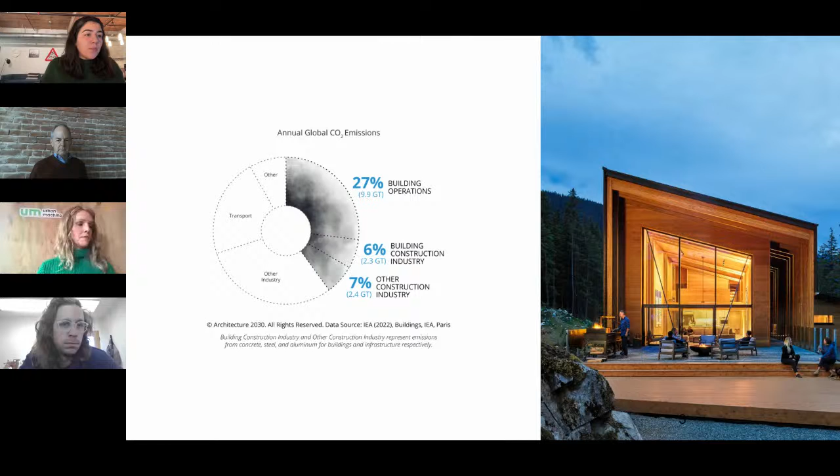And so that leads into SE 2050. If anybody has heard of Architecture 2030, SE 2050 is very similar, except we gave ourselves 20 extra years. SE 2050 is on a mission to transform the practice of structural engineering in a way that is holistic, firm-wide, project-based, and data-driven.

When you commit to that, one of the main ways we do that is we have to submit these annual ECAP reports, called the Embodied Carbon Action Plans reports. It's this accountability that helps keep moving firms forward towards being net zero by 2050. We have to submit them to SE 2050 every single year, telling them what we did this year and what we plan to do next year, which I think is a really big driving force in changing the industry on the design side.

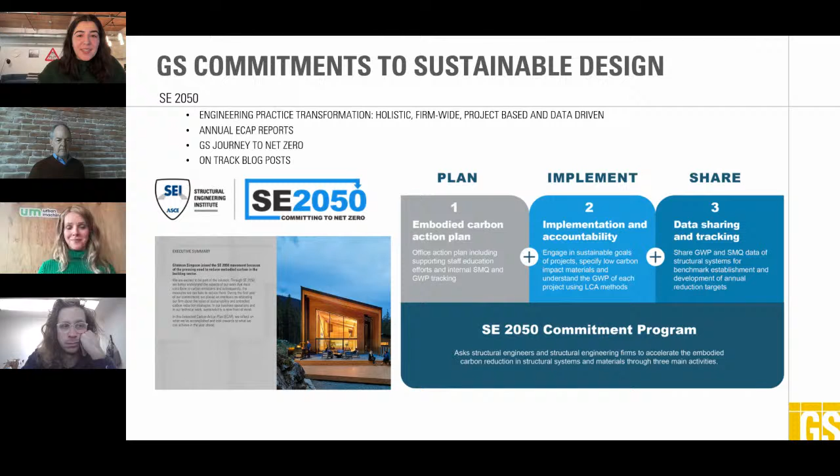So look it up, SE 2050, great program. Okay, diving in, I think design policy really is a driving force of design. For embodied carbon and all materials in general, it's very prominent in mass timber for a variety of reasons, which I'll go into.

So British Columbia. My company is based out of Vancouver, British Columbia, for multiple reasons. One of them being that a lot of our mass timber is sourced in British Columbia, so they have a lot of resources to be able to implement action towards mass timber.

British Columbia has been really great in advocating for increased design in mass timber. They created this Mass Timber Action Plan, focused on the people, the economy, and the climate. What's really interesting is it plays a key role in their Stronger BC economic plan. The province is basically saying they see the implementation of mass timber as directly correlated to the economic growth of the province, and tying that together makes it easier to implement mass timber on the policy side and the funding side.

They created the Mass Timber Advisory Council, whose job is to make sure the Mass Timber Action Plan is taking place. Then they have this Tallwood Initiative, which allowed design firms and developers in the province to adopt new provisions for mass timber about 2 to 3 years earlier than the code was put into place. That's why you see more than 200 mass timber buildings in British Columbia.

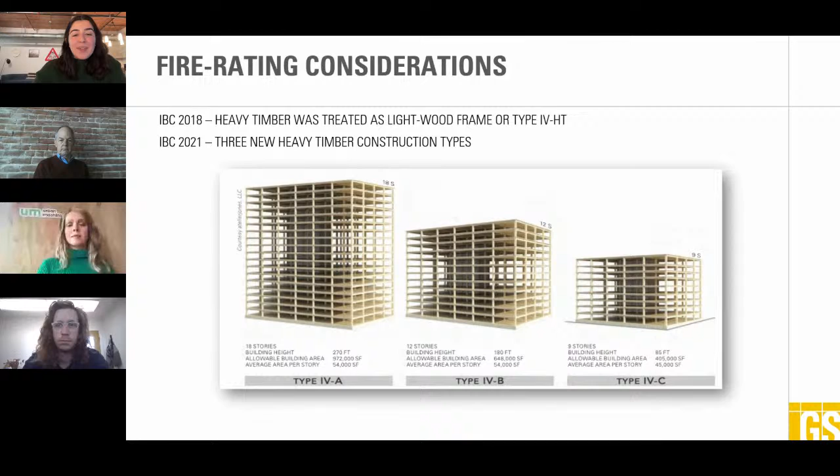Whereas when you have shorter story buildings, things can be more exposed. And the residents or occupants in the building can directly benefit from being in a place that has mass timber, being in a natural environment with natural materials.

So what we've done at Glotman Simpson is provide this GWP comparative analysis for sustainable efficiency. It's used at the very preliminary stages of the project. That's when we can be helpful as structural engineers in providing guidance on what a mass timber building would look like, and we provide these comparisons. Obviously there are other considerations that the developer and architect have to consider when deciding what kind of material they're going with, but this has been really helpful in providing additional information on the global warming potential intensity for different systems.

And when it comes to global warming potential intensity, a lot of times mass timber wins.

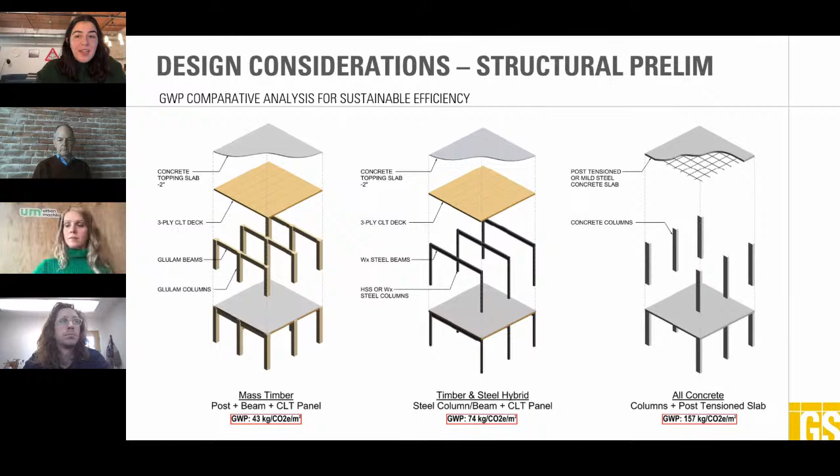So I talked about 843 North Spring Street slightly. One of the really big design considerations, this is our project, a creative office use space in Chinatown, Los Angeles, really close to downtown Los Angeles. It's almost completely built now, and it's insane how the real life building looks so close to this rendering. It just speaks to the beauty of mass timber and CLT.

This project was a hybrid mass timber building, so you use CLT framing with steel. You see these black steel beams, the black steel framing.

One of the primary reasons this was used was because this building was also an adaptive reuse. The podium level — let me use my laser pointer — is at this level, and everything below was existing concrete. The design also had one grade below of parking. So the design really tried to preserve all of the existing concrete.

Specifically due to the lightweightness compared to a traditional steel frame with concrete metal deck, the lightweightness of the 5 stories above the concrete podium allowed us to preserve the foundations and avoid a full-scale demolition and excavation of the existing structure. So it was able to become an adaptive reuse.

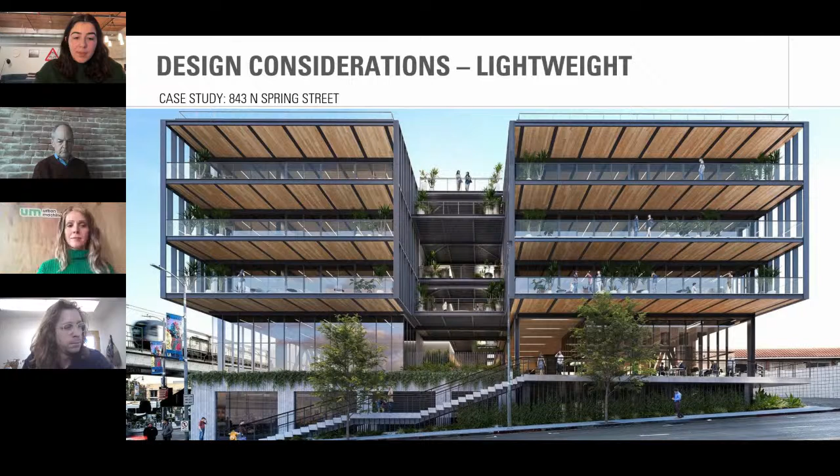So I think the lightweightness of mass timber is something that should really be taken into account during design. Another design consideration is vibration, which ties into something I'll talk about later — a lot of times, especially for creative office spaces, we have to provide a lightweight concrete topping in order to meet vibration considerations for the occupants.

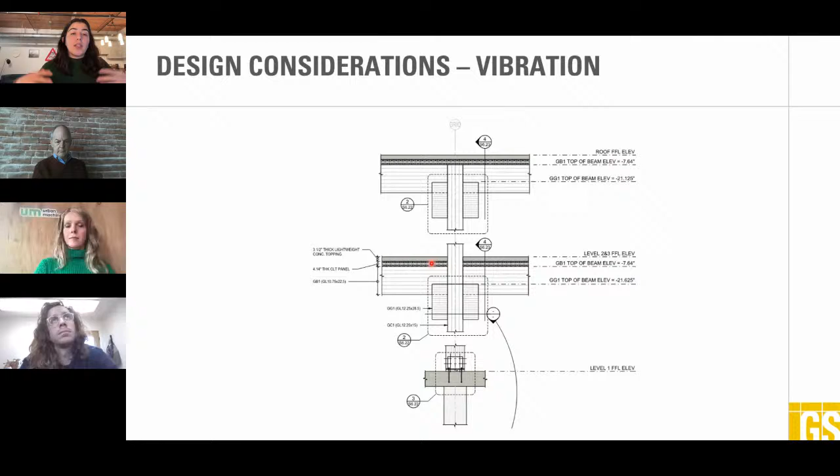The concrete topping used to act as a diaphragm before CLT was able to be considered useful as a seismic diaphragm. But now it also functions for vibration, and when you have these exposed structures, you're also able to route conduits through the lightweight concrete topping. So you have a lot less MEP in the ceiling space next to the beams, and you just expose the beauty of mass timber.

So going into design considerations of specifications and reusing mass timber, you really have to look specifically into the structural integrity and strength. One of the things I think Urban Machine does really well is they regrade everything that they reuse. So as structural engineers, as long as it's regraded, we can end up using it.

It's really important to have a modular design. It's really crucial, especially if it's intended to be used for deconstruction and reuse.

When you are considering reused lumber, a lot of times you have to consider the treatment and condition of the timber. So you have to evaluate whether preservatives, fire retardants, or coatings are used. The moisture content, which I'll talk about in a little bit, is really important.

Connection systems, like using low emission adhesives - this was something I learned from Urban Machine, which is that it's really difficult to remove the glue from existing lumber. From what I know, in almost all modern timber construction where you use plywood and joists, in order to mitigate the creaking that happens, they'll glue the top of the joist to the underside of the plywood, and that makes it really difficult to reuse.

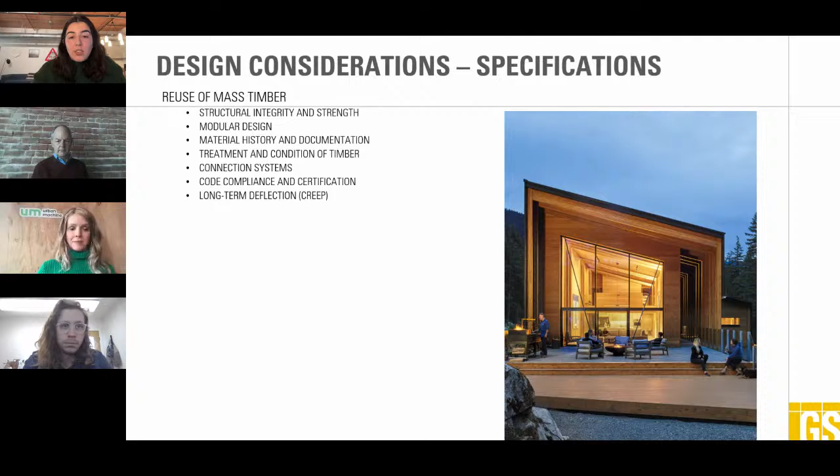Specifying specific grades and species of mass timber is really important, because different species are more susceptible to creep, like maple, beech, birch, and spruce. They're more prone to moisture-induced changes, which can exacerbate creep. So specifying things like Douglas fir, where they're less prone to moisture-induced changes, would be more beneficial long-term.

And Jory, please stop me whenever you want. I know I'm a little bit over time, and I'll try to go a bit faster.

Designing for deconstruction and disassembly, I think the devil is really in the details and in the connections. Standardizing sections across projects is really important, and standardizing the layout in the rectilinear grid is also important.

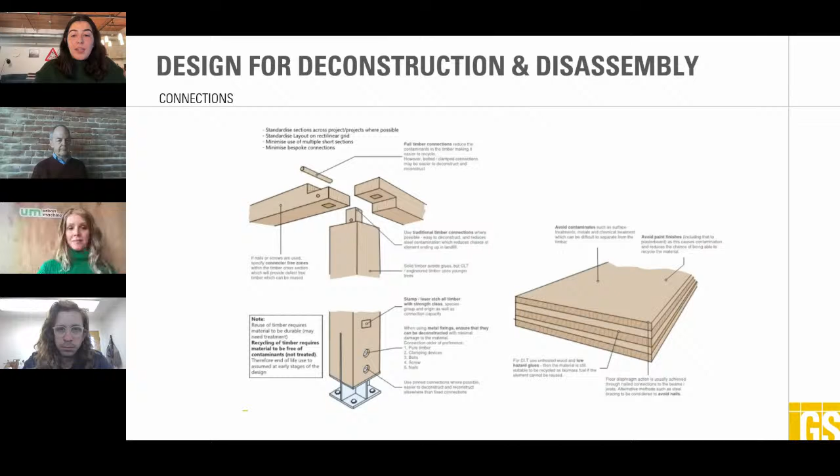This is a really cool building that we're working on currently, and the connections that were created are just really fascinating to me.

The way that we modularize the building is that we have these glulam columns, and MEP routing is a huge consideration when it comes to mass timber. Like I said previously, you can use the concrete topping to route smaller, like 1-inch conduits through it, but then you have these larger pipes that you need to route through the floor system, and especially when everything is exposed, everything has to be well coordinated.

For this project, we came up with this really cool connection detail, and it allows for easier disassembly. Even though it's using screws and stuff, you have this typical girder to column connection that is used throughout the project. The whole project is modular.

The layout of the project is modularized to have these two glulam girders come and bypass the column and then sit on these little saddles for that support, and then bring that load back into the column. That's the main girder system. And then we have beams intermediate in between the girders that go over the girders, or frame into the girders, to reduce the span and provide secondary support for the CLT.

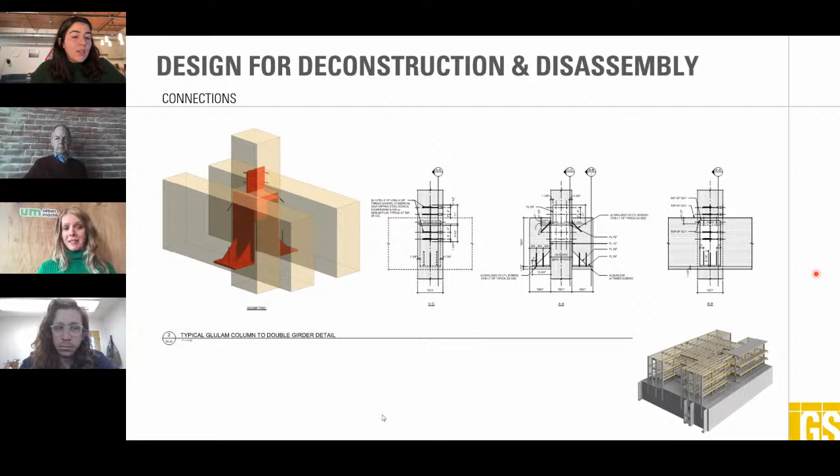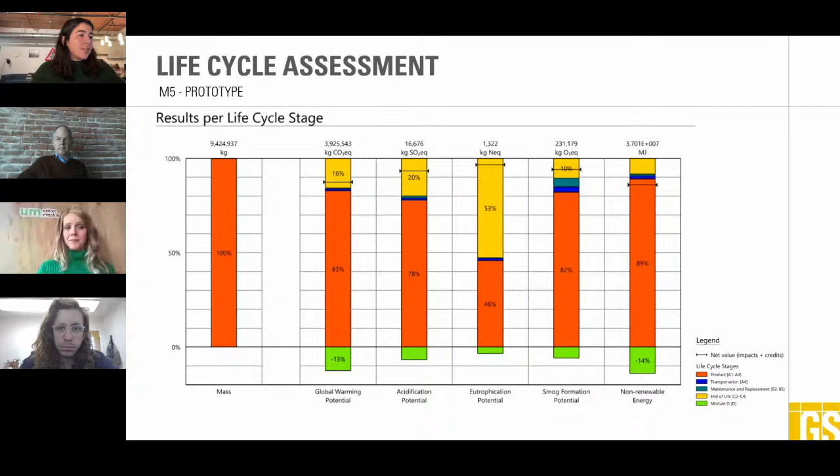All these slides just talk about connections. I did do an LCA on the M5 prototype, the one I showed previously, that was part of that funding program. It was 18 stories of hybrid steel and mass timber system that sat on a podium at level 3, and it just highlights how much global warming potential is coming from the concrete, the metals, and the wood portion.

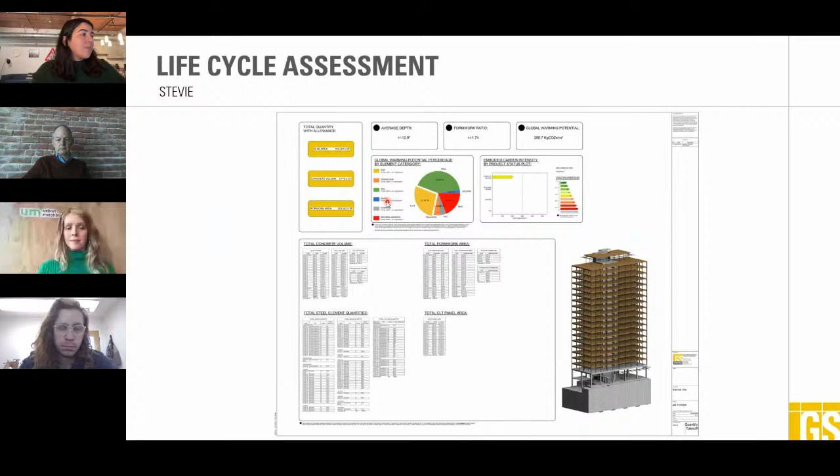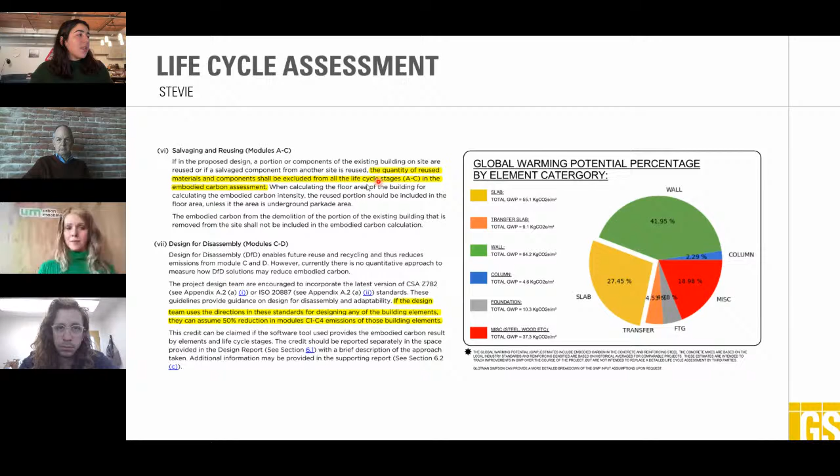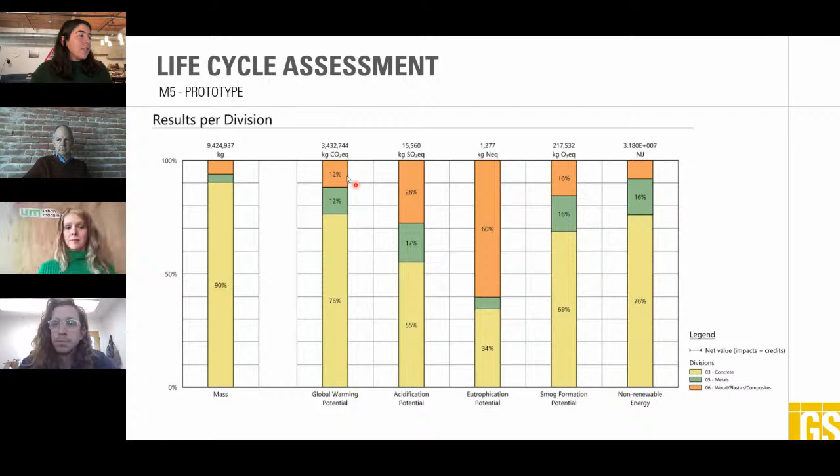What I wanted to talk about is that policy, like in Vancouver's new embodied carbon policy, the reuse of salvaged materials. If you do that in your design when you're doing an LCA, they can be excluded from all of the life cycle stages. So you get an immediate decrease in your global warming potential due to the wood, if it's reused. So that's super helpful. And yeah, that was basically it.

Sorry for the long presentation. No, that's fine. I really appreciate your passion. It shows how much you really love what you do, and you definitely are showing it in your presentation.

I know people can reach out to you if they have further questions. And I just want to clarify one thing: Urban Machine, our robot, is removing all the metal fasteners from construction wood waste, so that wood can be reused. We're very confident with our regrading, and we're working on technology for the structural regrading piece. So I just want to clarify that we're not there yet, but we're working on it. Paul knows all about it because we've been working our machine on some projects, plural. But the big one, or the one most relevant here, is about making DLT out of reclaimed wood.

I'll present a bit on, as Jory mentioned, we've been working together on a project to bring DLT to California, with a focus on reusing or using salvaged lumber. This presentation is kind of like the progress we've been making over the last couple of months on bringing the tools pretty much to enable the fabrication of DLT made from local lumber, either from local forest or from salvage sources like Urban Machine is providing to California. A bit before that, I just want to give a quick introduction on my work. I've recently started as a Professor of Extension, Cooperative Extension at UC Berkeley. So part of my work is helping companies like Urban Machine bring more mass timber in California. And I do also academic research on engineered wood products and design.

The idea is that, on one side, we have carbon emissions coming from wildfires in forests in California. This is an insane number, but the wildfires in 2020 have negated reduction over the last, I forgot the exact numbers, but pretty much I think the last 10 years. So all the efforts in reducing climate change in California have been negated by one year of wildfires. So wildfires are an important source of carbon emissions in the state, and we need to do something about it to make sure that we can reduce the carbon emissions of the state of California.

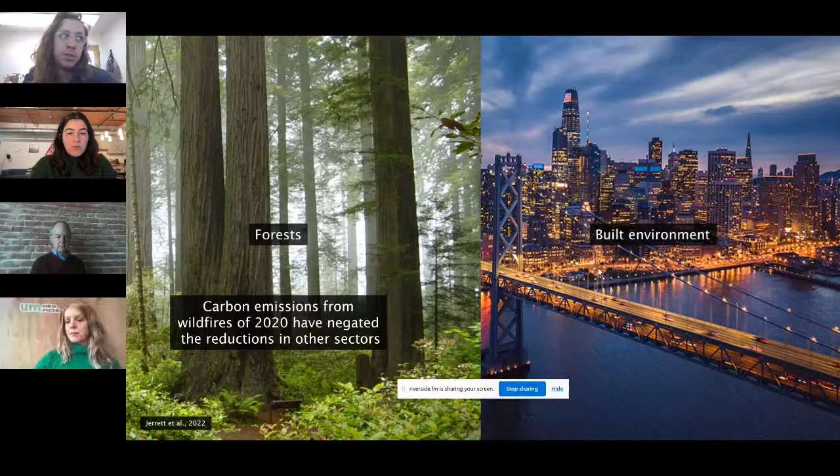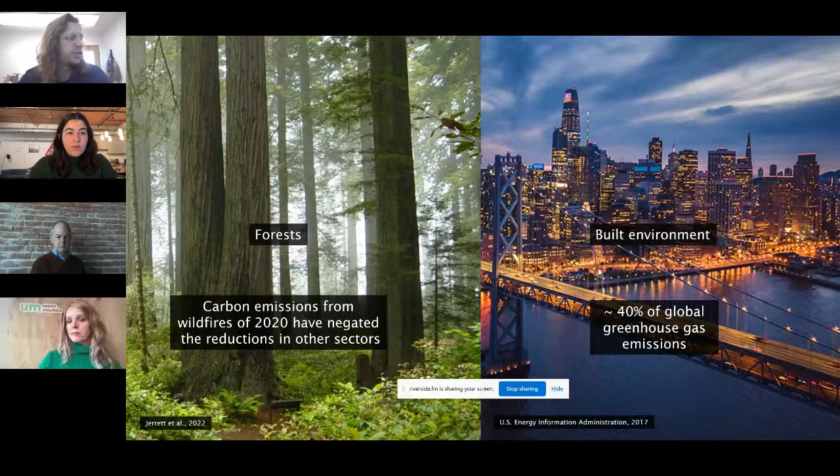This was mentioned before in the previous presentation, but the built environment also has a large impact on global greenhouse gas emissions, both from how much energy we put into operating buildings, so operational energy or operational carbon, but also embodied carbon, so how much carbon we produce or emit by creating construction materials and building our cities. So instead of being a clash, maybe we can have something that works together. One of the challenges here is that on one side we have forests, and that means we need to reduce wildfire risk.

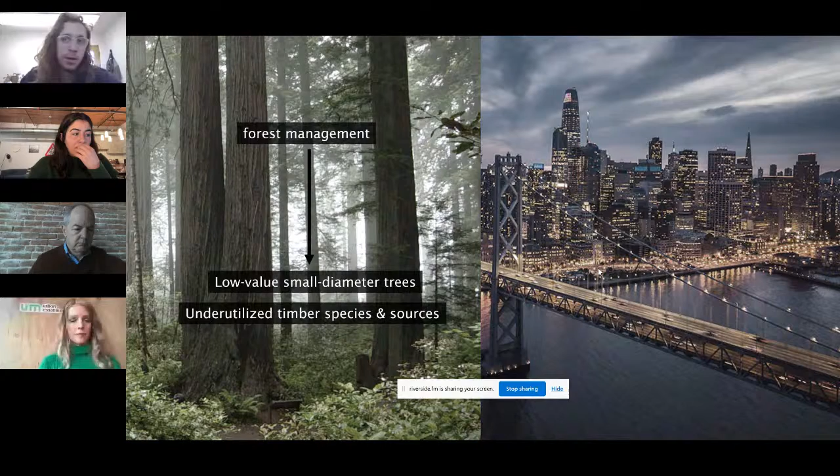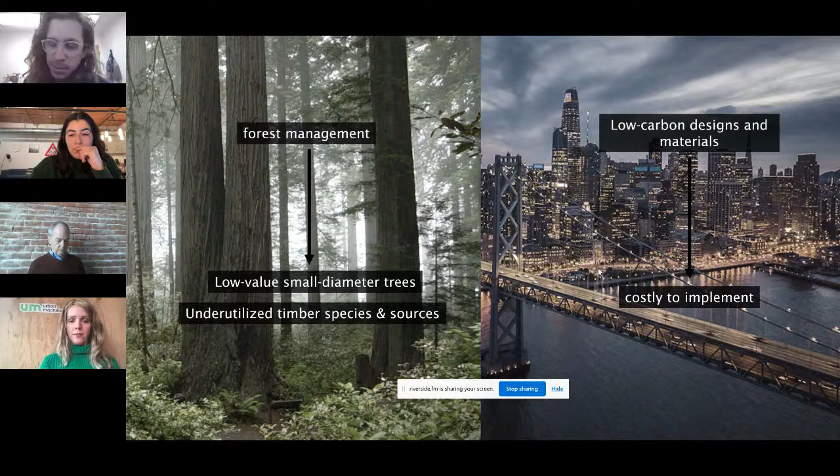That means we need to get small diameter trees out of the forest, and also use more underutilized timber species and sources. And from the construction side, in order to have lower carbon designs and materials in the built environment, we need to make sure it can be affordable, because a lot of solutions now are costly to implement, even for technology that makes it lower carbon. Some designs in mass timber still challenge the existing models, resulting in being more expensive. We see a lot of places where mass timber is challenging to make affordable. So I'm excited to see the next presentation by oWOW, because I haven't seen the new building, so I'm excited to see how this comes out.

But my work at UC Berkeley is trying to find a way to better utilize wood that we have in our local forest to support forest management. So the question is, how do we take what needs to be taken out of the forest and make wood buildings out of it? The idea is nothing new, but it's how do we solve the engineering and design challenges so we can have high added value building products to make sure we can support forest management.

And the two main topics of my research is low carbon engineered wood products. So how do we produce and make mass timber products that have an even lower footprint on the environment? Another aspect of my research is taking elements of farm to table, that has been really successful in agriculture to bring more sustainability to the way we produce food, and apply these principles to something I'm calling forest to frame. So how we connect the source of materials to the end use in the building as a design framework. And what I'm going to present today on is the dowel laminated timber for California.

So the work that's been happening over the past couple of months with Urban Machine. And really, it comes from the realization that there's a lot of interest in California to have mass timber projects. This is from a report that was recently published by the Board of Forestry and Fire Protection in California, where we have about 180 projects that are either built or in design in California. So that's a lot of interest in mass timber projects, but we have no mass timber manufacturing in the state of California.

Part of the idea is coming from this idea of taking ideas from the farm-to-table movement or agriculture, where we can see that small farmers are responsible for quite a bit of production of food supply worldwide. We've seen in the past what has happened with some mass timber manufacturers, that going too big could be very challenging, both because you need a very steady supply of forest logs in the same location, and you need a lot of investments to make it work. I think it's been challenging in the past couple of years, although everyone knows that mass timber is desired in the States. There's been no one wanting to build mass timber manufacturing facilities, or at least there's no one that's done one so far.

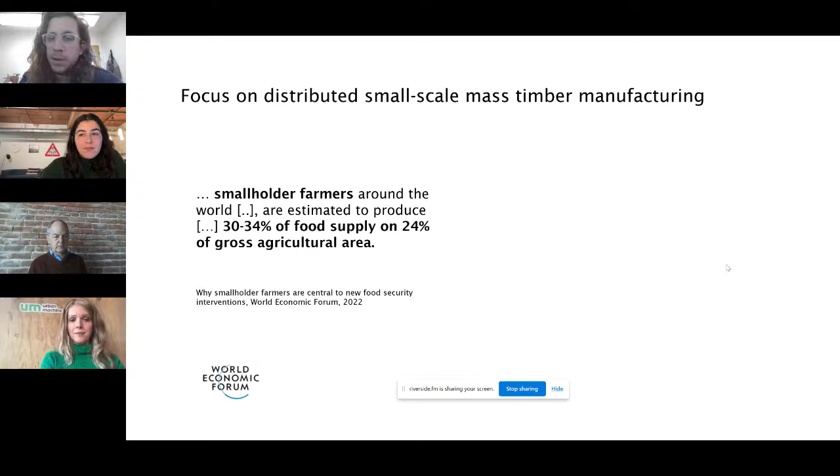So the idea here was to focus on small scale NLT and DLT manufacturing for a couple of reasons: it's a low initial investment, it's a very simple manufacturing process, and I'll show some pictures of it in a few minutes. It also requires lower skill levels than other engineered wood products like CLT and LVL, because of the glue involved in those products. So the manufacturing processes are a bit simpler, especially for NLT, where you're literally just nailing boards together to make a product.

One of the big reasons we focus on NLT and DLT is that it's already in the codes in most places in California, recognized as a building product. I'm currently at the Richmond Field Station, the old site of the Forest Products Laboratory on UC Berkeley's campus, and the buildings next to me are all NLT panels. The whole building is built with NLT.

The technology has been around for a very long time. It's well known, really easy to make, and already in the codes as mechanically fastened timber panels. So it's a good first step to bring manufacturing of mass timber elements in California.

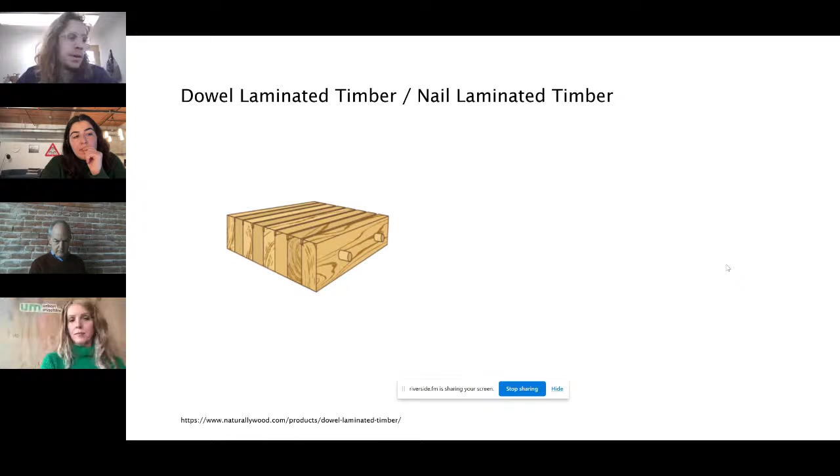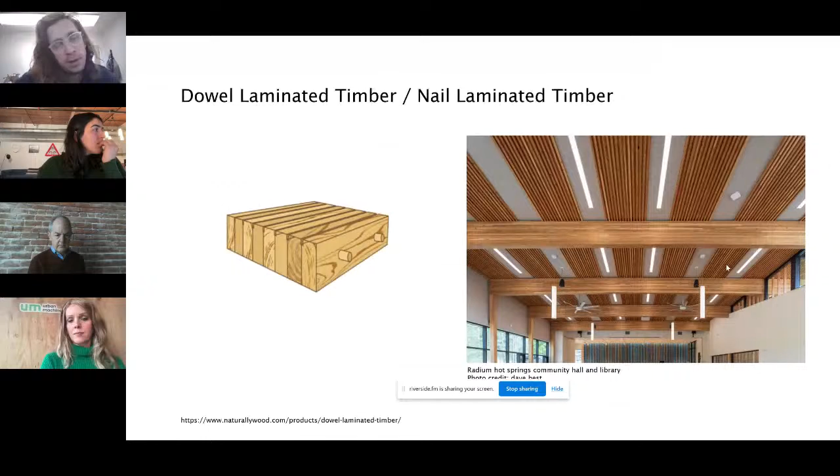What was interesting when we started talking about this with Urban Machine is that there's no mass timber manufacturing in the state, and there's a lot of focus on trying to bring CLT to California. But it's been really hard to find the funding, and also the skilled workforce to actually do it.

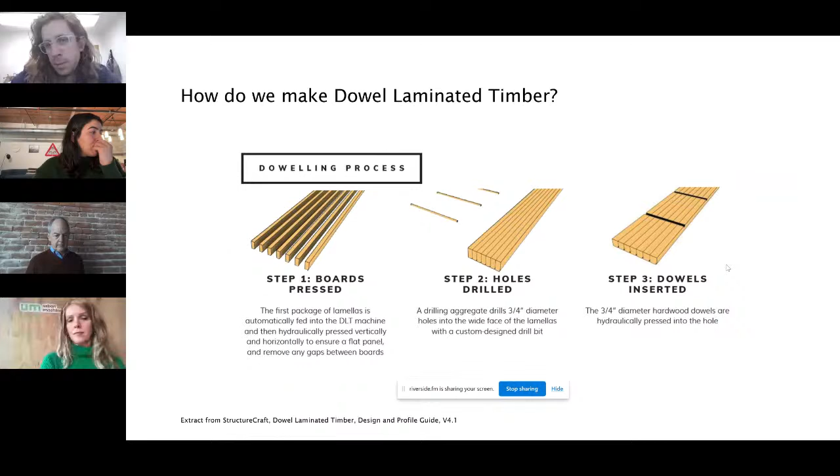One of the issues with this machine is that it's very costly—$2 to $3 million just for the machine, plus a lot of other associated costs. It also has a lead time of 2 years to get. So if you want to act fast in providing California with sustainable building products, that time frame is a bit long to start manufacturing panels here.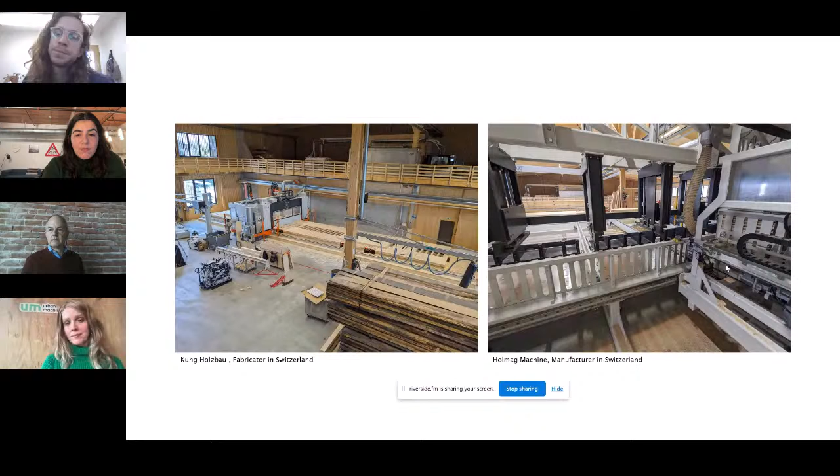As a first step, I think it was important to do some education and show people that we can manufacture dowel laminated panels in California. So I'll show a few pictures—these are the tools. It's less than $500 to make panels, which I've made here at the Richmond Field Station.

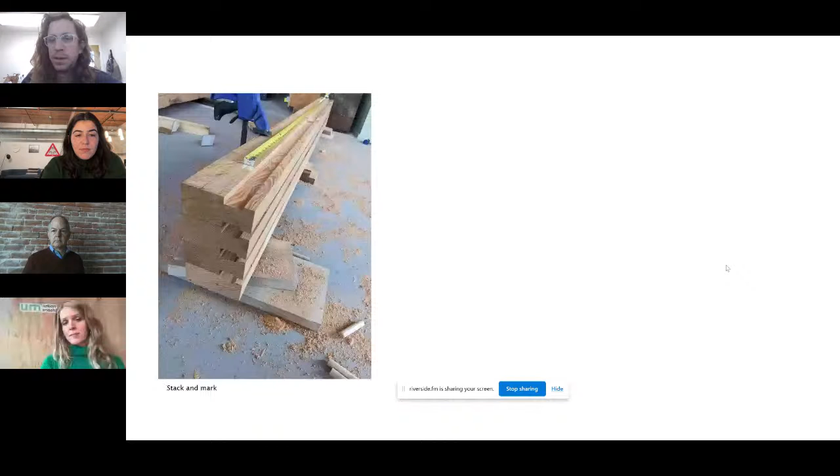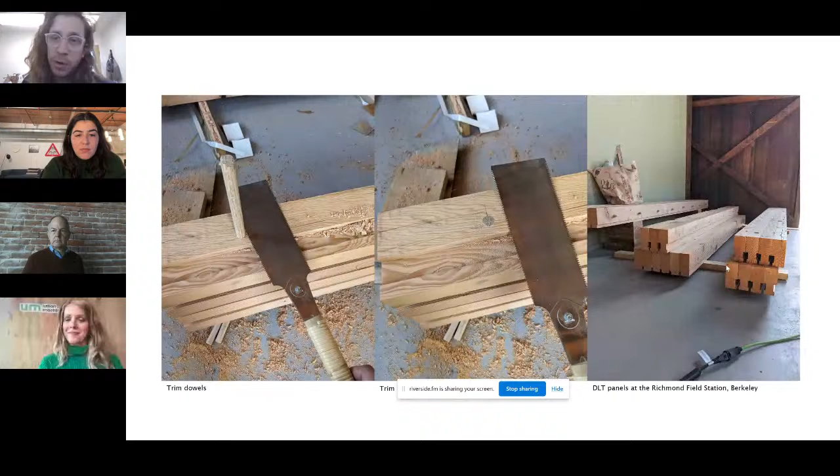You can just stack the wood, mark the location of dowels, clamp it together, drill the pilot holes, drill through the stack, then hammer in the dowel and push it through, repeating until you've completed a whole DLT panel. Then you trim the dowels, and you have a couple of DLT panels. This is what's been happening just behind me here, showing that it's not that complicated to make DLT panels—and these technically could even go into real buildings.

They have slight imperfections because they were handmade, but it's just to show that it's not that complicated to make these panels. And with the skill level required, you can also imagine a very simple shop where you can manufacture these panels with very low skilled labor. I've been teaching a couple of people already how to make these, and there's a lot of interest in how to make these panels.

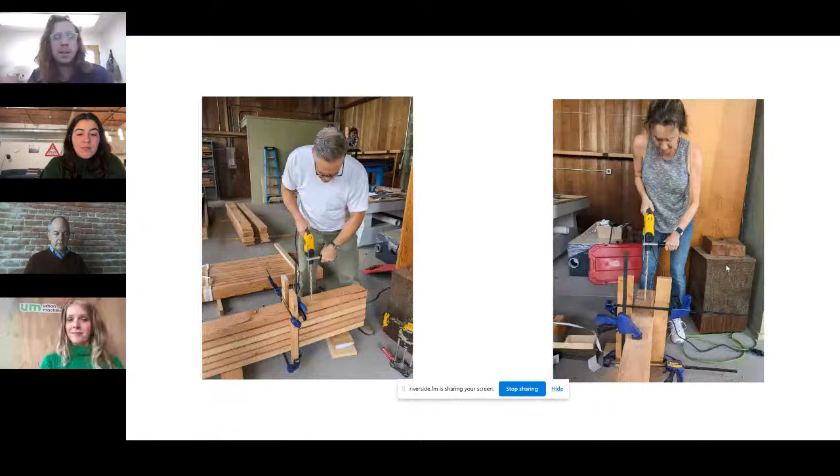The next step here is this machine that we've been working on with All Bay Lumber and Urban Machine, designed by Dees Design and Engineering, where we've taken inspiration from the machine in Switzerland and learned from making these panels in the shop here to make a small scale, simpler machine that doesn't cost a couple of millions, but maybe closer to $100,000 to be able to make DLT panels in a small scale manner.

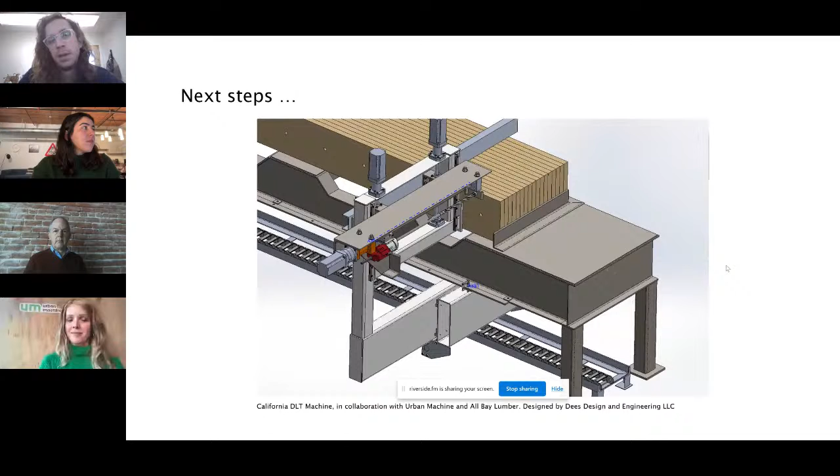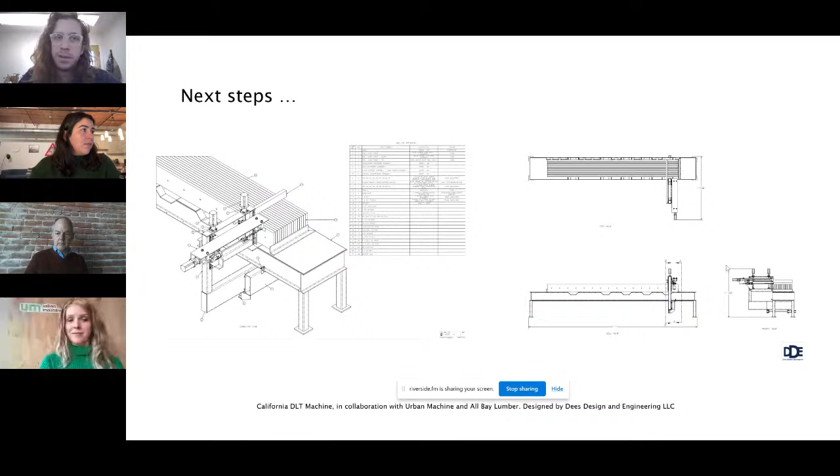We're really close to having the machine ready. This is the construction drawings of it, and hopefully we'll be producing some panels next year using some of Urban Machine's lumber. So this is kind of like a hope for 2024 that we'll have DLT in California next year. Thanks for listening, and happy to take any questions either now or later, or you can also email me. Thank you.

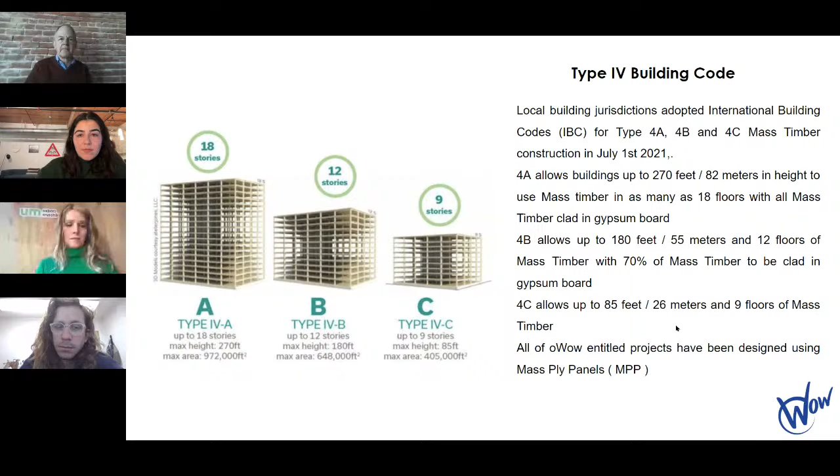We're using mass ply panels. Mass ply is different than CLT, DLT, or NLT in that it utilizes 1/8-inch veneers, peeled from logs. The logs that we can use for that are what Paul referred to as the small diameter trees that have been causing our massive forest fires, and not just fires but fire storms, because they're ladder stock. They're 6 to 8-inch trees that allow the flames to get up into the canopy of the old growth trees.

Forgive the train in the background. There's going to be one going by about every 5 minutes. Hopefully that doesn't interfere with being able to hear me.

It's great that the forests are being managed now in a more responsible way and starting to cut out these smaller diameter trees. And it's great that we can use those smaller diameter trees to build these panels that have high value. We did independent testing and found that we could actually get up to 2.5 times the load, and even higher in punch shear, between a CLT panel and an MPP panel, which can be built up to 12 feet wide and 48 feet long.

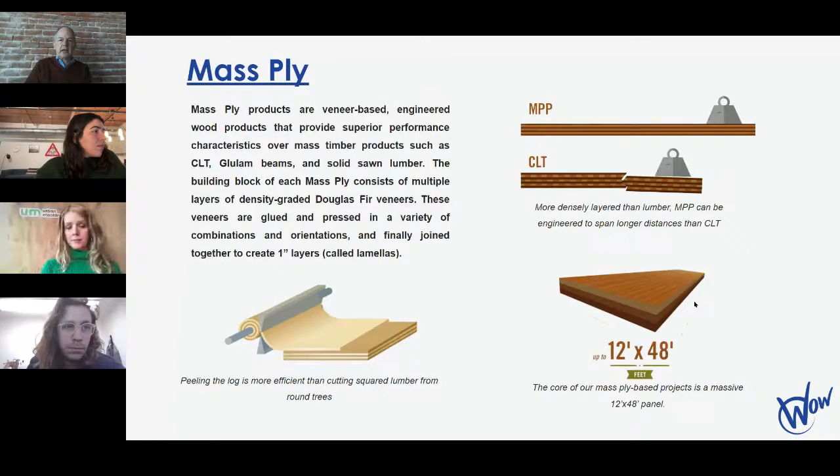We also did fire testing. It's amazing that you really can't burn this stuff. It's non-combustible, although it's not listed as non-combustible in the codes, but you can't catch it on fire. It chars up, which then insulates it and really prevents it from burning more quickly, until that char layer falls off. As previously mentioned, it's amazingly beneficial for the environment.

We saved about 5,000 tons of CO2 from going into the air by utilizing mass ply panels in lieu of concrete. So for every cubic meter of concrete that is replaced by a cubic meter of mass ply or mass timber, you're preventing 2 tons of CO2 from going into the environment.

Mass ply is actually much more efficient than CLT, in that you're not cutting rectangular shapes out of a round tree, which results in 20 to 25% waste. Instead, you're peeling it, and it comes down to a 3-inch core that's used as a grapevine stake.

The outside bark and other parts are actually burned in a biomass facility. All of the nitrous oxides are taken out through an electrostatic precipitation chimney, and that drops to the bottom, and the resulting waste is used in fertilizers. So it's amazingly efficient. It's a zero net waste, zero net energy product.

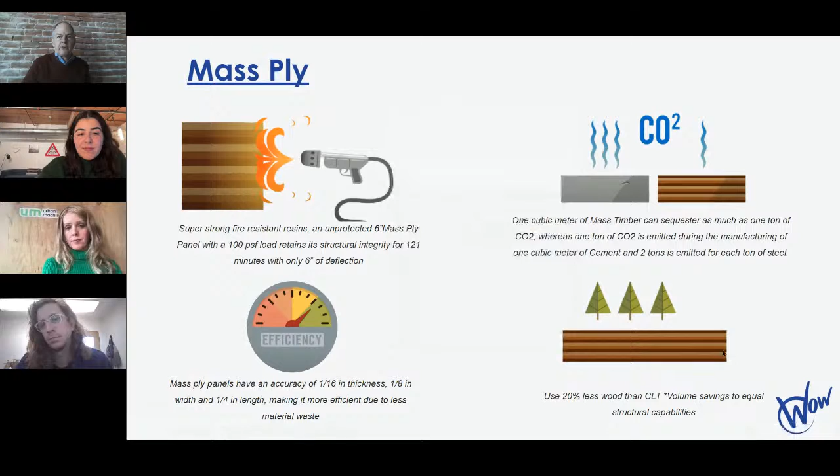Freres, I'm talking about, you can see that the logs - that's about an 8-inch log going into the plant. It's peeled, graded. They have a mill with 17,000 acres of land in Oregon, about 580 miles away from us. Here's a quick video.

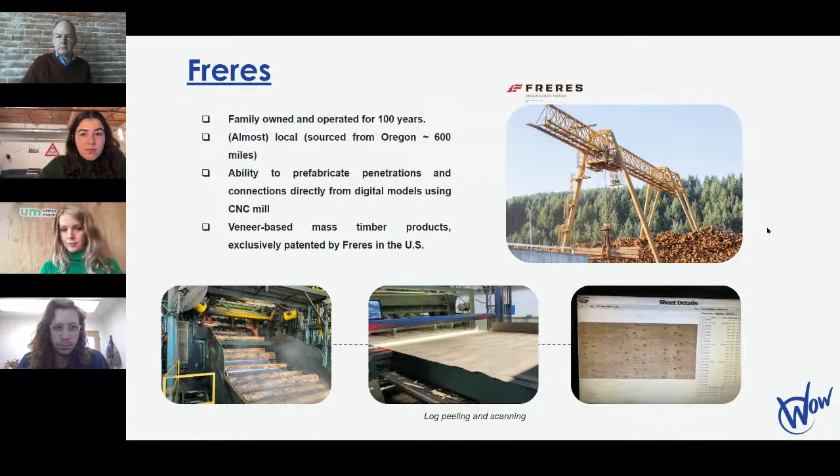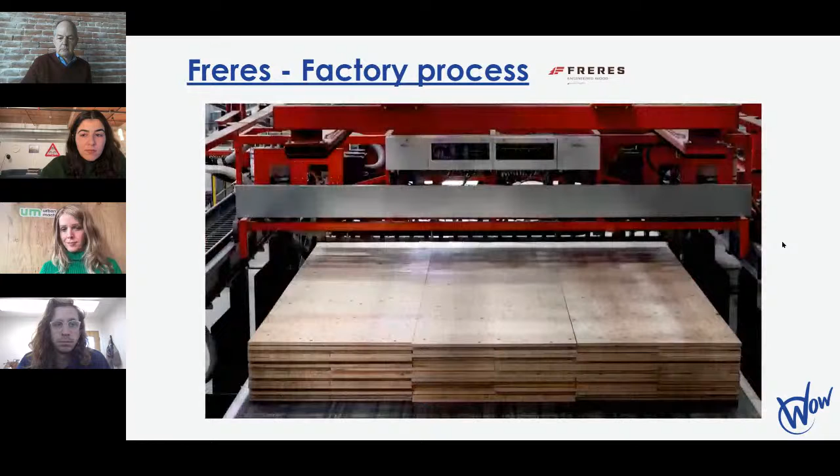That's a pretty informative video. As Rachel was saying, Vancouver, at the heart of our case study, was Brock Commons, an 18-story tall student housing building finished about 3 years ago, with Fast + Epp as the engineer. It was really innovative in that it was what the Australians call post and plate, point-loaded, beamless CLT, 5-ply.

About 7.5 inches thick, with column spacing of 10 by 12. They erected the 2 concrete cores first, which took about 7 months, and then put up the mass timber superstructure, which took about 6 months. The finished building ended up being about $8 a square foot more than a comparable concrete building, and took about the same amount of time.

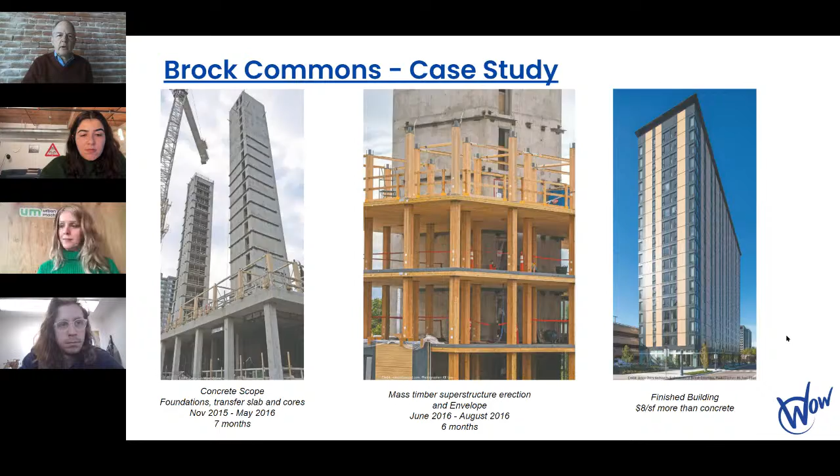But seeing the point-loaded structure, we thought that is incredibly efficient - that's what we want to use. We just had to figure out how to get the cost down. So we started off with the traditional exposed glulam beams and CLT, and realized that just wasn't going to work for what we wanted to do.

This is a 5-story building. We built the first 2 floors under a separate permit, and then when we went back and put in the residential floors, you can see it was very different. It was a 10 by 12 spacing, but we're using mass ply panels. We came up with a custom connection, using an internal hardy panel that was a moment frame, and it was very cost effective and very fast.

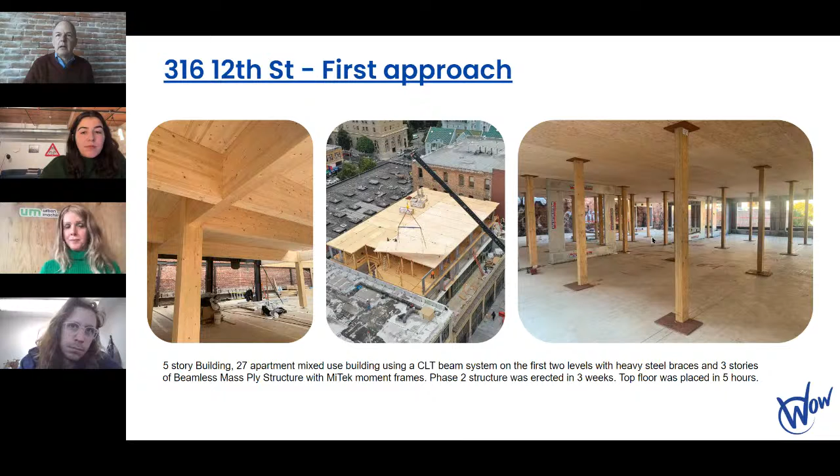We did further testing up at WSU in Oregon. Sorry about the blue beam trying to take over the presentation. But we learned that the structural values of that were incredible - testing more than 2.5 times that of comparable testing on CLT.

And the fire testing indicated that really we didn't need to have anything whatsoever in order to still maintain a full structural load after 2 hours of burning. In fact, if you put on 3 layers of drywall and burn it, the concrete structure - an 8-inch thick slab - falls down before this mass ply panel does when it has the 3 layers of drywall, which is obviously gross overkill. Testing has shown that basically everything in an apartment burns and is done after about 20 minutes. So why we have 3-hour ratings when everything inside burns after half an hour, I don't know.

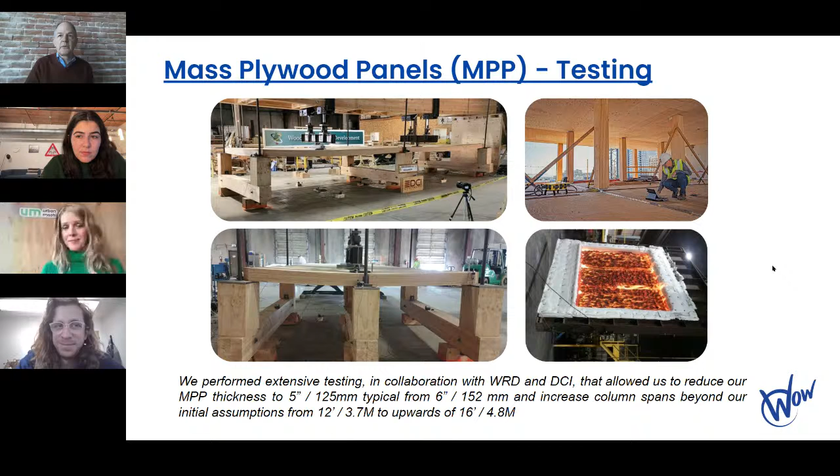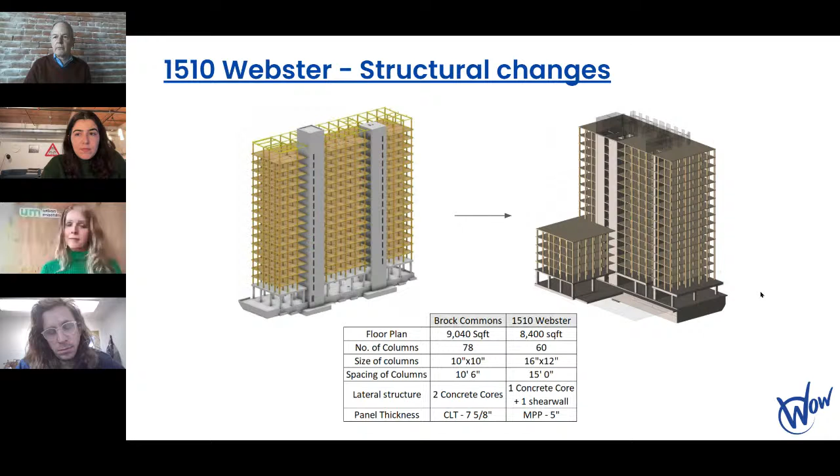And there you see the building. We're a little bit beyond that right now, but it has one big core, the blade shear wall, 19 stories. We actually have a 2-story concrete podium with a basement level, 236 dwelling units, $72 million cost - that's $400 a square foot. So how does that compare to a concrete building?

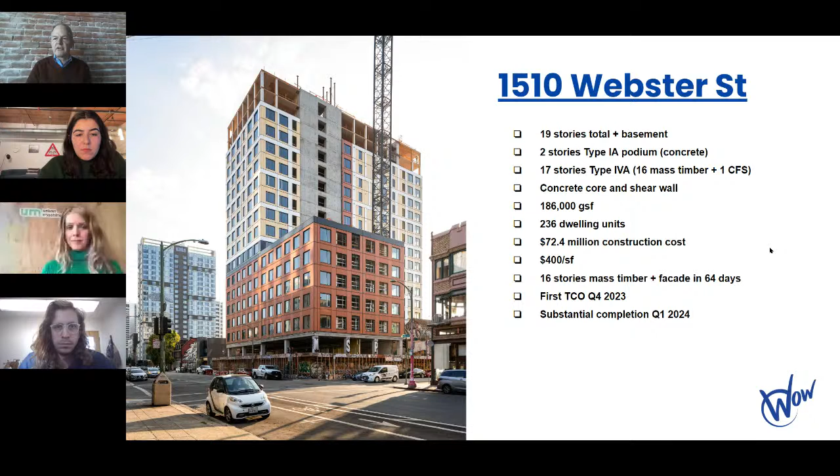This quick summary shows that if I take everything into consideration in a comparison, we save about $4.5 million - that's a 20% savings overall compared to the concrete building. What started off as a $100 million building with concrete and curtain wall ended up as a building we're actually building for $71 million. So substantial savings - I believe it's the only building that went to mass timber and actually was less expensive than concrete.

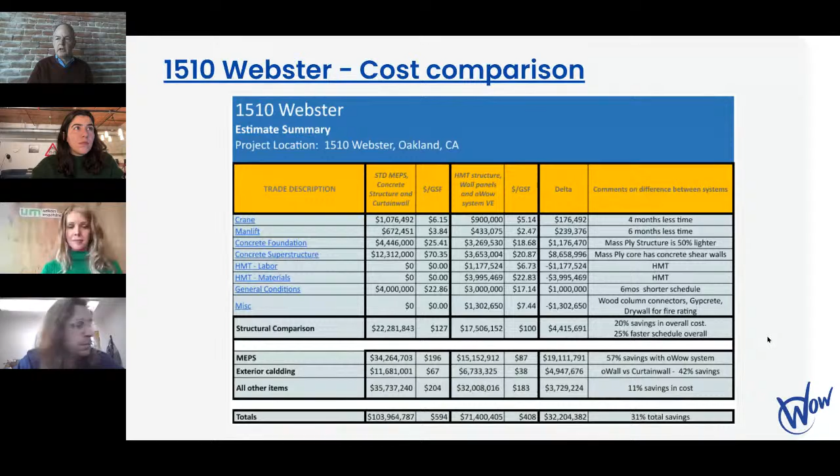But what we're trying to do here is to create a building that isn't an architectural wonder with a bunch of exposed wood, but a building that's actually going to be able to be used in downtown areas, urban infill, and provide a way for us to deal with the missing middle - the people, the majority of whom would love to live where they work, but they can't afford to.

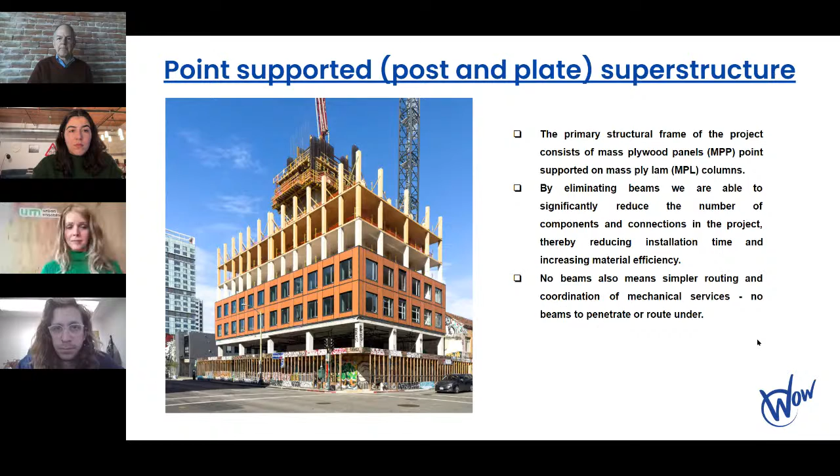So we're trying to solve that problem. We use extensive BIM modeling, virtual design and construction to get to the exact placement and layout of everything that's penetrating these. And these are CNC'd up in the factory. They come to the site about 6 to a truck, and they go in at about 10 minutes a panel.

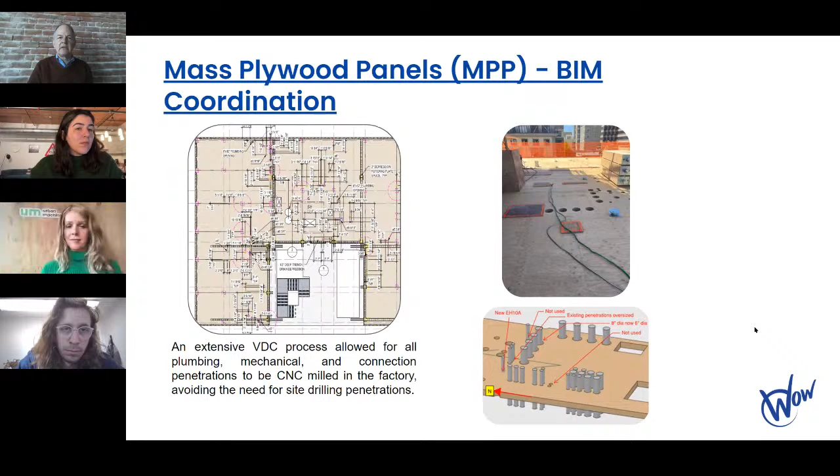Amazingly fast. We use a Rothoblaas pillar connection. We can set each column in about 3 minutes, and that connection is very cost effective, very fast. It's a wonderful, amazing connection. Thank you, Rothoblaas, for that.

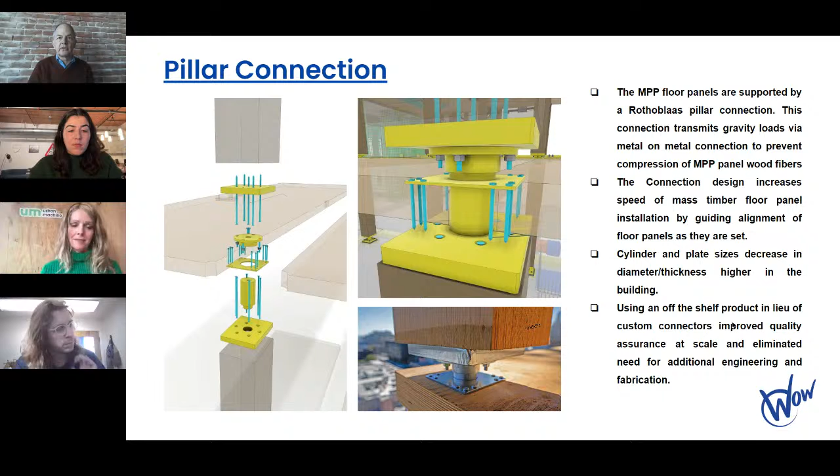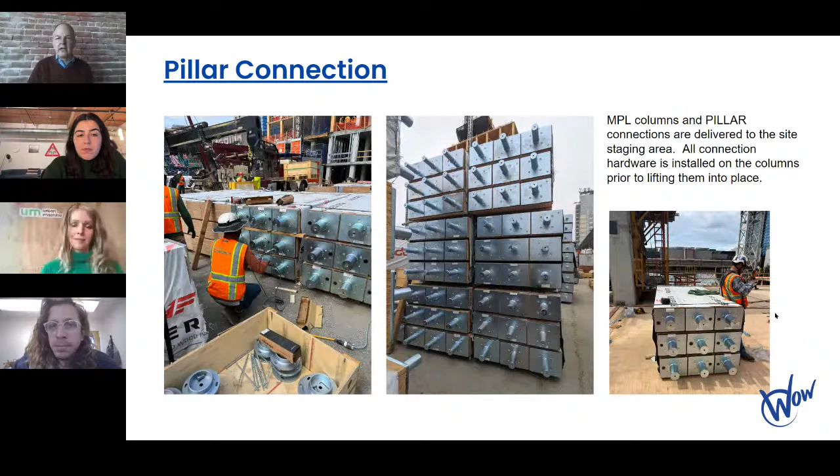We put them in right at the job site, so we don't have to go to a secondary fabricating facility, and the whole process is fast. We eliminated the routing at the edges with the plywood strips, and we just went with a Simpson strip, 18 gauge, and screwed it in place. That goes in very quickly.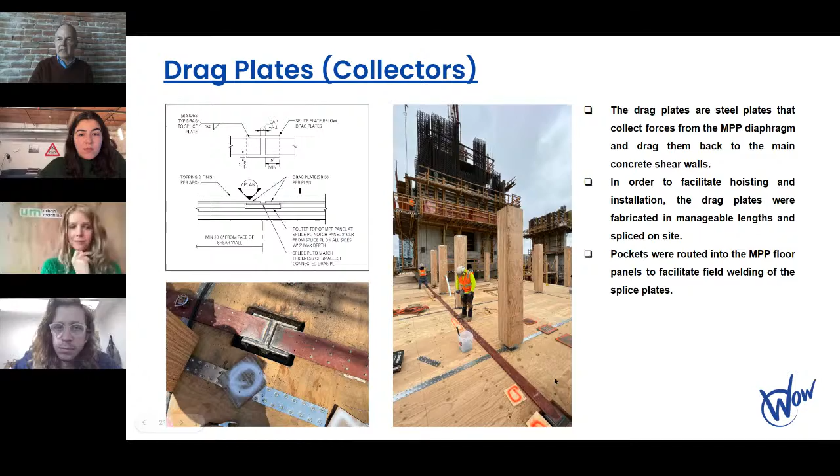The drag struts go back to the core. We broke those down into manageable pieces, and because we didn't want them to require a topping slab, we routed it out and connected them underneath very efficiently, tying them back, welding them to the cores. We have an edge diaphragm that serves as a pour stop as well as supporting for the cladding.

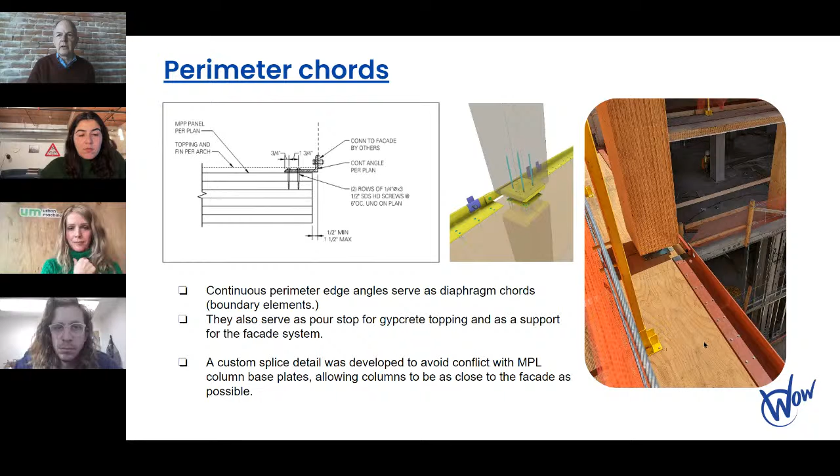Unfortunate - it looks beautiful before, not so good afterwards. We put down a very thin 3/8 inch Acousti-Mat with a 1-inch gypcrete topping on it, so there is no structural topping slab. Amazingly good sound attenuating performance.

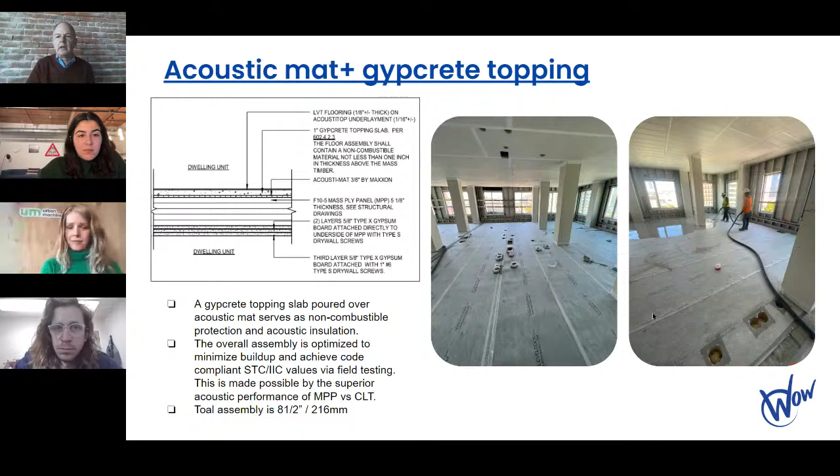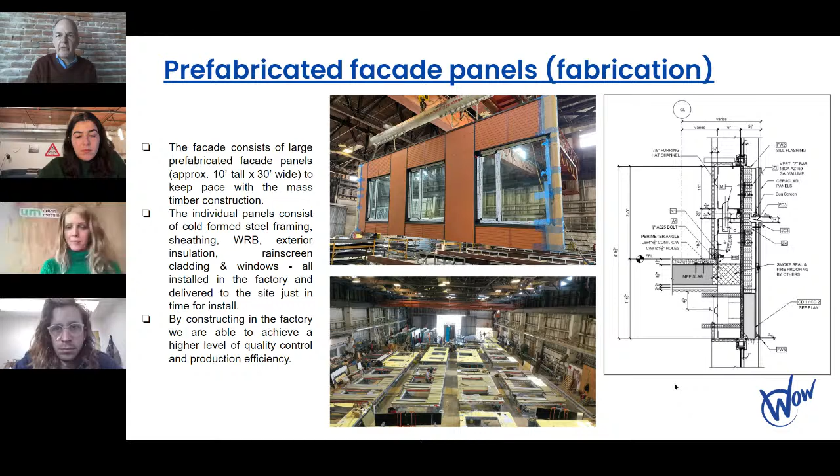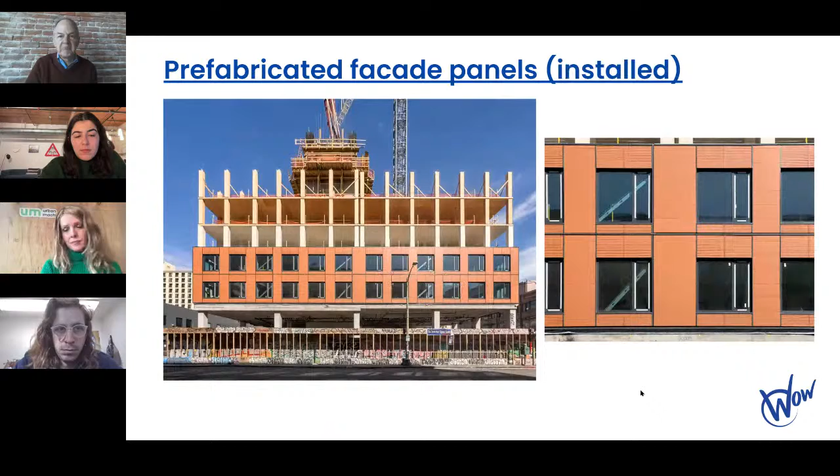Our exterior panels are fabricated in Canada, in Vancouver, by Centura. Very simple rain screen system on metal studs, 10 by 30. Those take about 15 minutes per panel. They come vertically, we pick them right off the truck, set them in place with a 7-person crew, 15 minutes a panel, and end up looking pretty good.

That's the result - very successful building. We've got 3 more in the works. We're starting in 2 months on 3403 Piedmont, which is basically an 85-foot tall, 4C, mass ply panels building. 960 Howard, San Francisco - this is 4B. And the next version of 1510 Webster is 1523 Harrison, and it will be 270 feet tall. So we're pushing the limits there, but everything we're doing is mass timber and mass ply. Thank you.

That was great. That was a lot of information in a short amount of time. Yeah, I generally took a lot longer than that in Melbourne, about twice as long, but I noticed we were running out of time, so that was the short version.